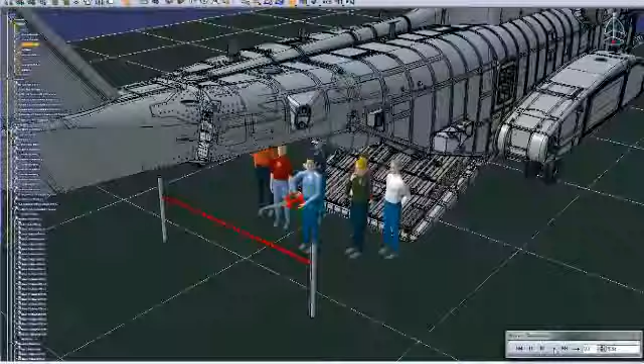Sikorsky Aircraft has officially launched a new virtual reality center for the CH-53K heavy lift helicopter program, taking the manufacturing of the next generation heavy lift helicopter for the United States Marine Corps into a whole new dimension.

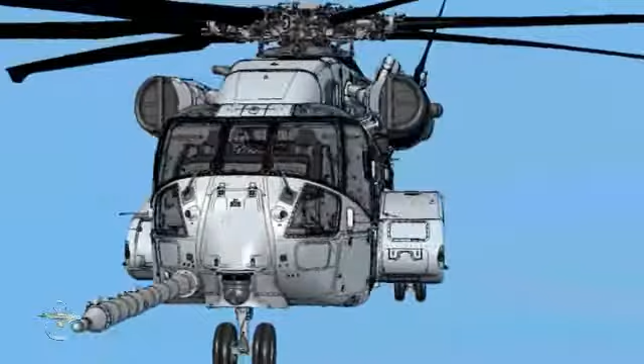Engineering is all about making things and making things better. And when you're engineering helicopters, you've got a lot of things to consider. Due to the size and complexity of the CH-53K helicopter, we had to be creative in adapting its design and development. The Virtual Reality Center is housed within the engineering laboratories at Sikorsky's main manufacturing facility.

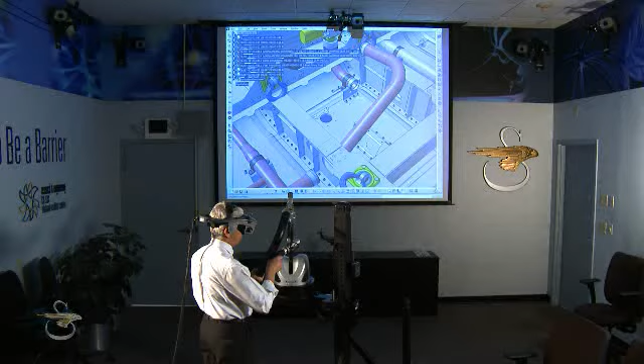12 cameras are strategically placed high along the walls, capturing movements of the operator, who is then immersed into the CH-53K digital environment. Head-mounted displays, sensored gloves, and a force feedback system allow virtual interaction with the aircraft. All data processing and recording takes place at the command center in the back of the room.

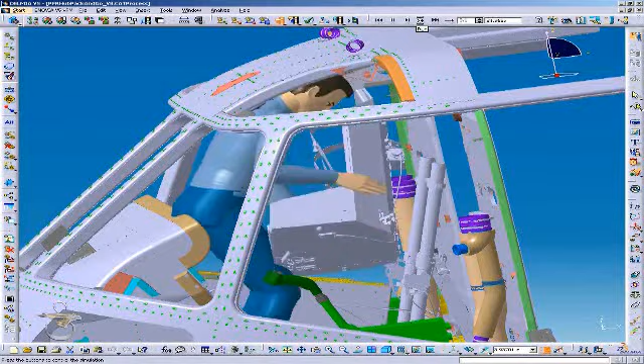Until recently, the work of the engineer was complicated by the limits of the physical world, and the testing and retesting that accompanied that environment was inefficient and costly. Now we can perform installs in this virtual, computerized, three-dimensional environment that allows us to animate the parts to see how they'll fit. All of this innovative technology comes together in what Sikorsky deems to be perhaps the most complex aircraft development it has ever undertaken.

Sikorsky is building the CH-53K heavy lift helicopter under a $3 billion system development and demonstration contract with the United States Marine Corps. The heavy lift mission is critical. It calls for an aircraft that can stand up to the daily punishment of temperature extremes, high structural loads, and harsh conditions that are associated with shipboard and austere location operations.

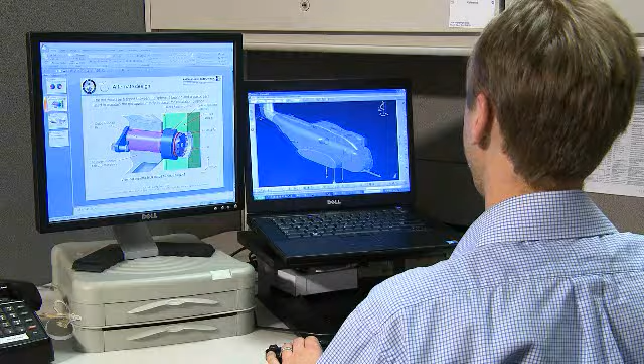Developing this large, complex aircraft is no small task. The use of a virtual reality center offers tremendous efficiencies, saving time and money in identifying design gaps long before the real components are ever assembled. We're building a helicopter that will have more than 20,000 individually designed parts, all of which have been modeled in a fully 3D digital environment.

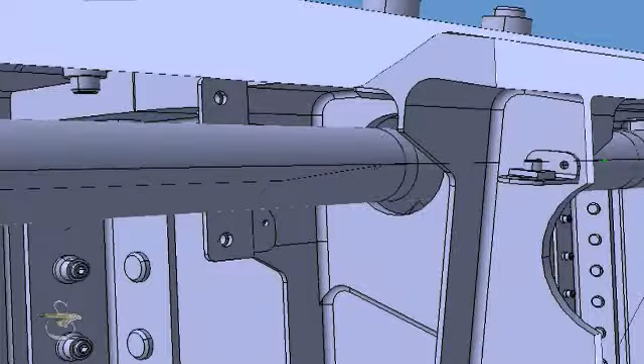Using the aircraft components the designers create with CATIA software, they can now determine whether the parts can be assembled within the required manufacturing clearances that are revealed by a color coding process. We have already yielded design benefits from the new software. We uncovered a handful of fuel lines that required modification because the parts would not fit into the aircraft as originally designed, or would have been damaged upon installation. We've estimated savings of about $18 million for this one event alone.

The efficiency of the Virtual Reality Center will carry over to the maintainer's role, ultimately delivering to the customer a one-of-a-kind machine, the most capable helicopter ever built.